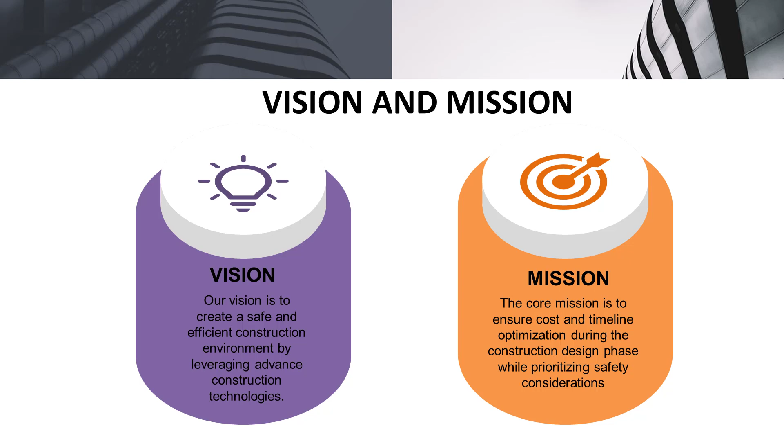The background information that was collected gave us a sense of understanding that worker safety risks and fire hazards in the construction industry result in numerous accidents, injuries, and fatalities. The U.S. construction industry accounted for a substantial percentage, 21.4%, of worker fatalities in 2019.

Moreover, clashes during the design phase lead to project delays and cost overruns. Conventional scheduling methods are often responsible for these delays, negatively impacting the project's cost and timeline.

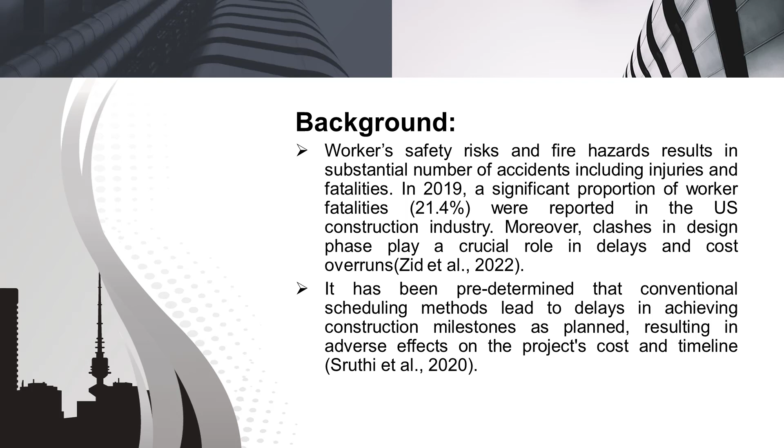Introduction to the project. This project aims to address the challenges of intensive multidimensional cross-mixing operations in building construction sites, which involve complex construction coordination, safety risks, hazards, delays, and overburdening costs.

By applying Building Information Modeling, BIM, principles on a case study of multi-story twin towers, there were two core phases involved. Phase 1: applications of BIM were utilized to optimize workers' safety and clash detection during the design phase. Phase 2 included dynamic project scheduling using Primavera P6.

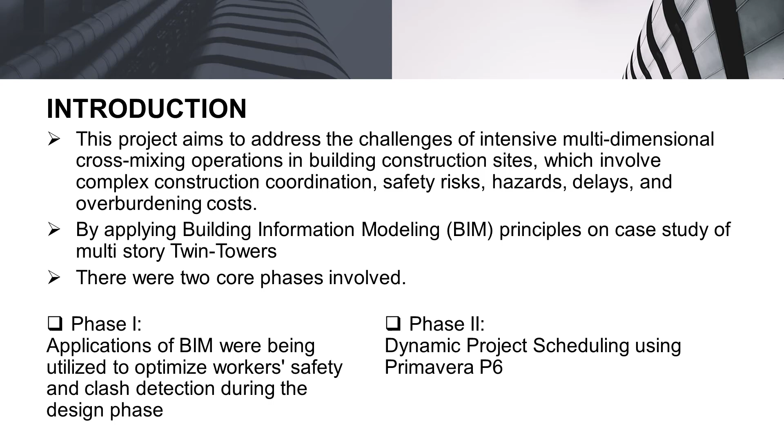A study revealed that through simulation and analysis of construction sequences, BIM enables the identification and mitigation of safety hazards, including fire and fall risks, as well as clash detection in the design phase.

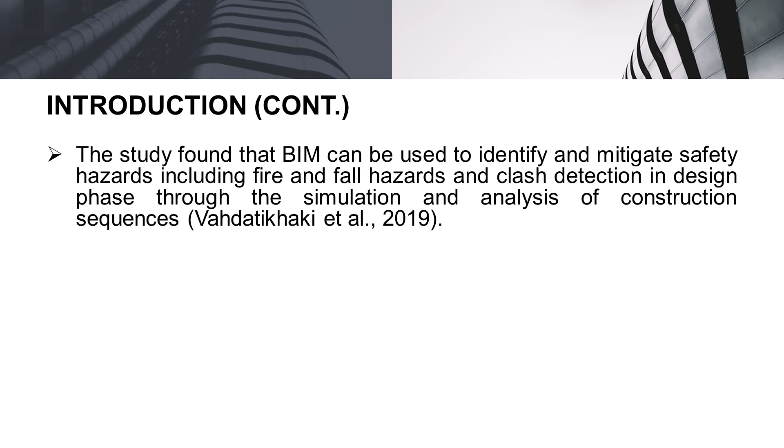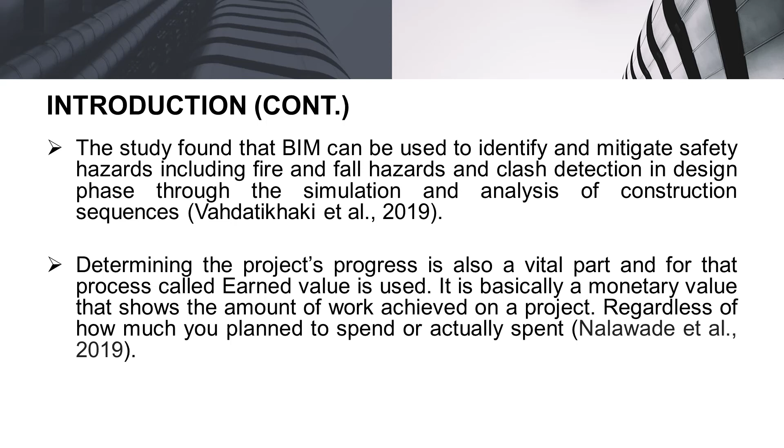Another vital aspect of project management is assessing the project's progress, and for this we utilize a method known as earned value. Earned value is essentially a monetary value that indicates the actual work achieved on the project, regardless of the planned or actual expenditures.

Objectives. We successfully achieved and followed the following objectives. The first one was development of a BIM model and implementation of 4D, 5D, and 8D BIM applications.

The second objective was analysis of the BIM model against construction safety risks and fire weak spots for enhanced constructability, plus its prevention during the design phase. The third objective we achieved was analysis of the BIM model to remove structural clashes and for design optimization.

Fourth, providing a helpful framework and generation of a safety report for workers' safety during the construction phase. Last and foremost was to get earned value analysis and resource curves.

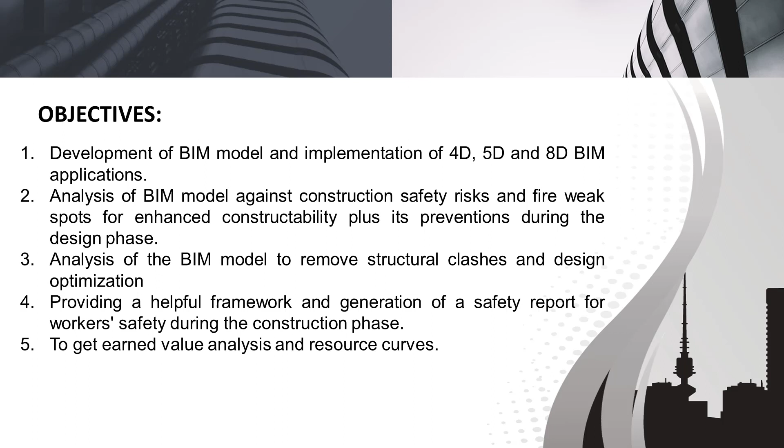The methodology that we used involved the following steps. Initially, a BIM model was created using Autodesk Revit. After that, IFC-based fire safety parameters were incorporated into the BIM model using Revit.

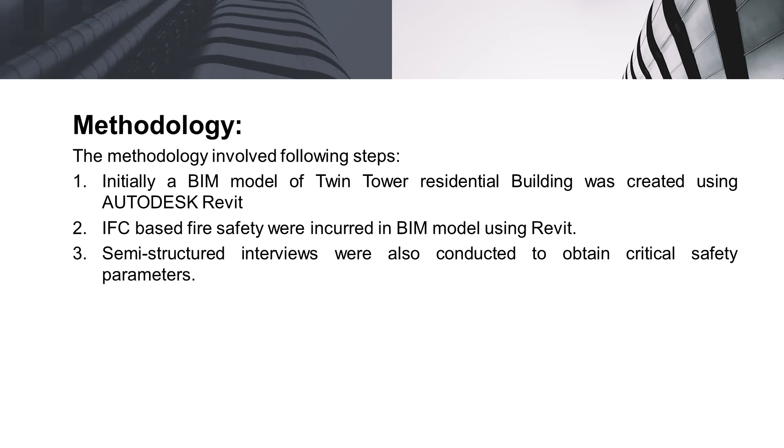Furthermore, semi-structured interviews were conducted to obtain critical safety parameters. The model was then analyzed against fire weak spots, safety risks, and clashes using Solibri Model Checker. After analysis, a safety report was automatically generated by Solibri.

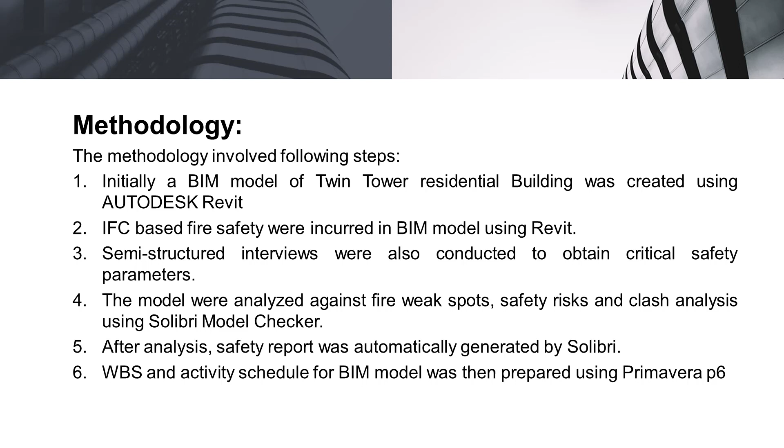WBS and activity schedule for the BIM model was then prepared using Primavera P6. Lastly, earned value analysis, critical path and resource curves were generated in Primavera P6.

Moving on to the results. Two sets of results were achieved during the project. The initial set of results were obtained using BIM, Building Information Modeling, while the second set of results were acquired through Primavera P6.

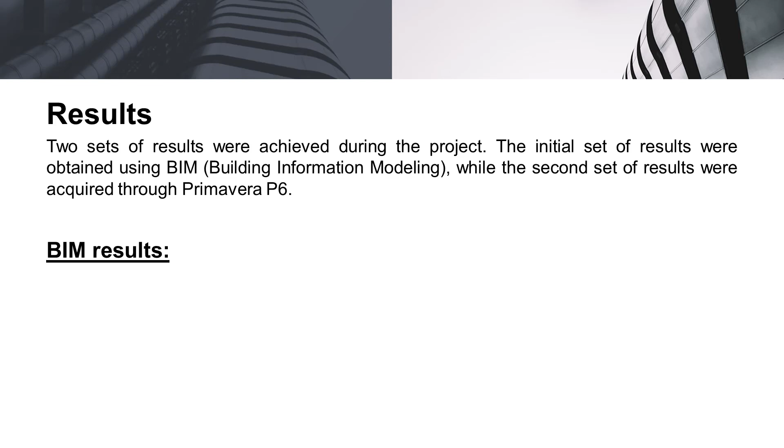For BIM results, three different types of resolution analyses were run. Number 1 was to check fire weak spots. Number 2, clash detection. And in the end, resolutions were run for fall hazards.

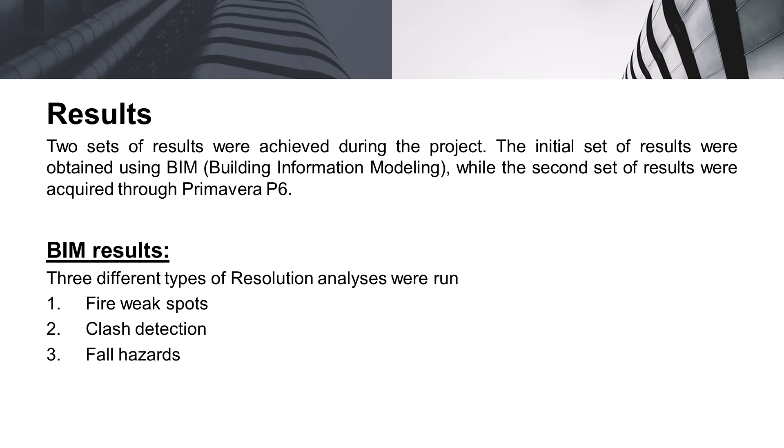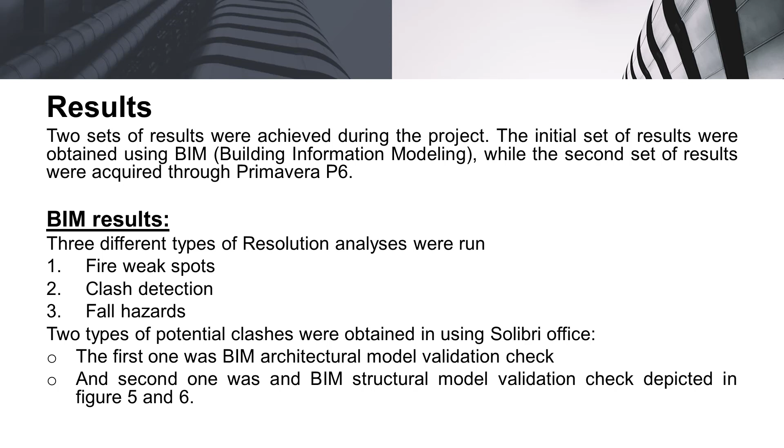Subsequently, two types of potential clashes were obtained using Solibri. The first one was BIM Architectural Model Validation Check, and the second was a BIM Structural Model Validation Check, depicted in Figure 5 and 6.

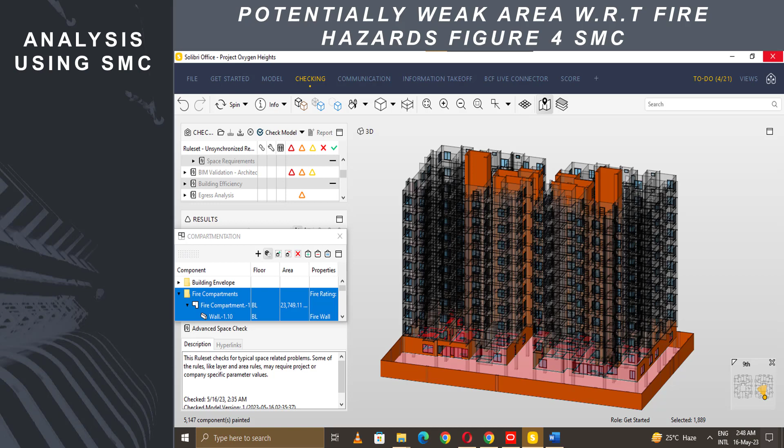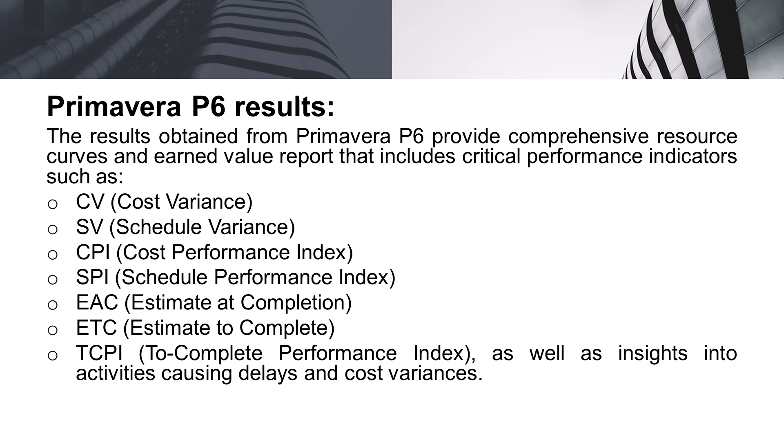The second set of results was Primavera P6 results. These results provided comprehensive resource curves and an earned value report that includes critical performance indicators such as CV (cost variance), SV (schedule variance), CPI (cost performance index), SPI (schedule performance index), EAC (estimate at completion), ETC (estimate to complete), TCPI (to complete performance index), as well as insights into activities causing delays and cost variances.

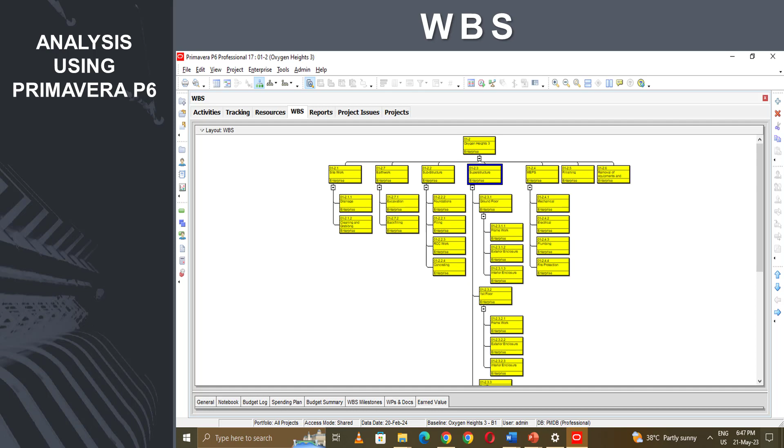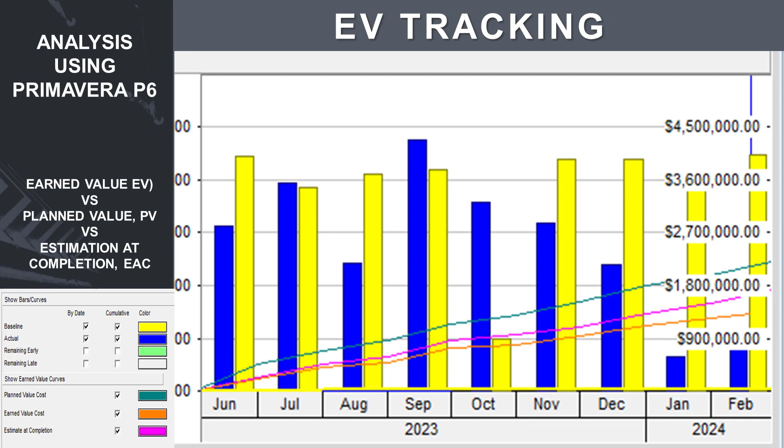This picture depicts earned value tracking, which shows earned value versus planned value versus estimate at completion. Finally, this is the report on earned value analysis that was generated in Primavera P6.

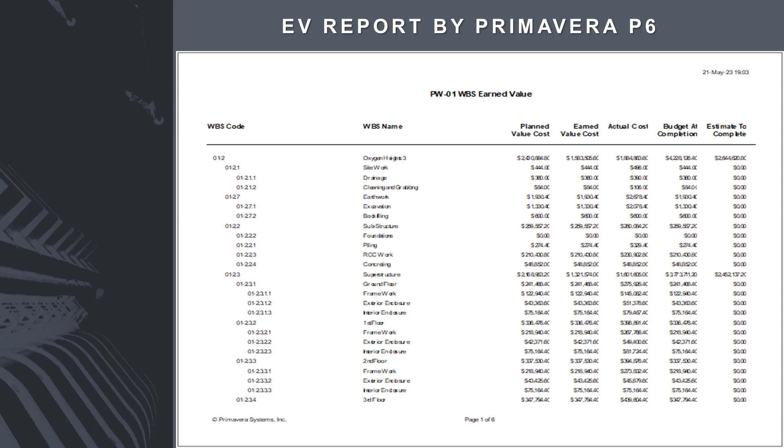Following are some conclusions that we obtained after completion of the project. Number 1 was that BIM implementation and Primavera P6 processes improved safety and reduced accidents. Number 2, BIM identified and resolved fire weak spots and fall hazards.

Also, safety reports documented enhanced safety measures through the BIM process. In addition, BIM proactively mitigated safety risks, improving overall safety performance.

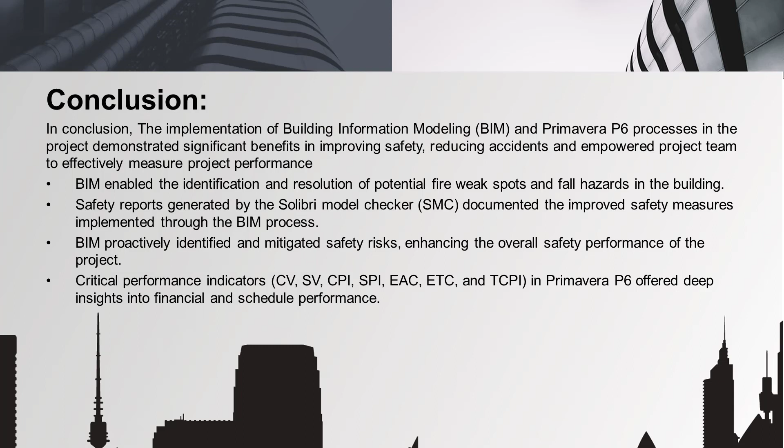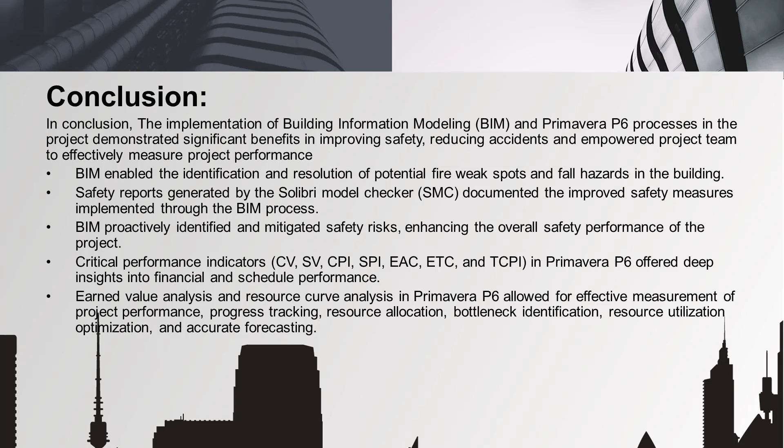Also, Primavera P6's critical performance indicators provided insights into financial and schedule performance. Similarly, earned value analysis and resource curve analysis enabled effective project measurement and tracking. And lastly, Primavera P6 supported resource allocation, bottleneck identification, and accurate forecasting.